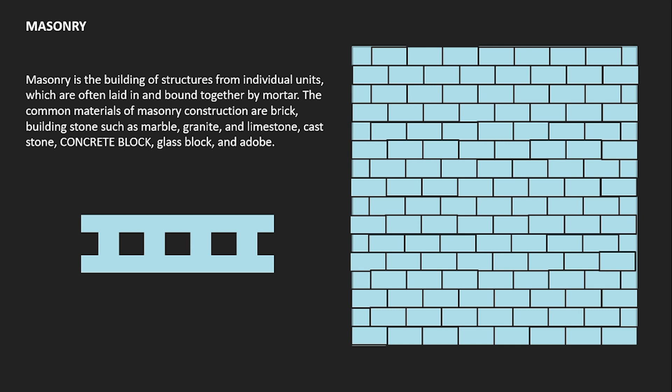Yung mga materials natin na kailangan ma-estimate dito, we have the number of concrete hollow blocks. Number 2, the number of bags of cement na gagamitin natin for mortar. The volume of sand, the gravel. Meron tayong gravel kasi meron tayong tinatawag na wall footing. Yung wall footing, nagkakaroon lang tayo niyan sa ground floor. And number 5, syempre mag-estimate din tayo ng steel reinforcement.

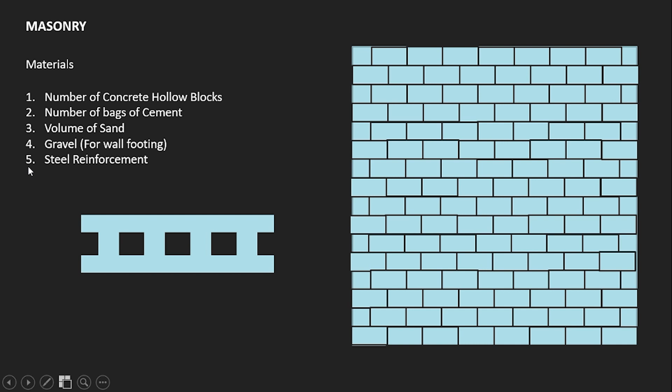Pero guys, for this presentation, magko-focus lang muna ako from 1 to 4. Saka ko na ituturo yung number 5 pag nag-start na tayo sa steel reinforcement. Ngayon, meron tayong iba't ibang components dito sa masonry.

Number 1, ito na nga yung concrete hollow blocks natin. Number 2, this is the mortar for block laying. Number 3, the mortar filler for hollow cell. Number 4, the mortar for plastering. And number 5, for footing.

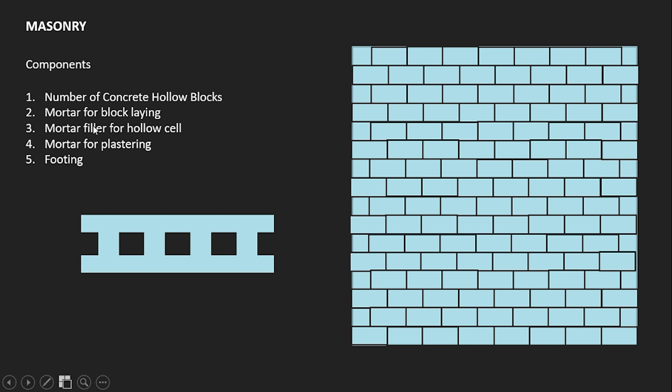Kung mapansin nyo, sa ibang books, walang mortar filler kasi nakasabay na yan sa mortar for block laying. Pero dito, in-indicate ko na hiwalay yan para makita natin yung difference. Tapos yung mortar nga, sabi ko kanina, is combination of two materials lang, which is cement and sand. Tapos syempre, magdadagdag tayo ng water. So yun lang yung mga components dito na kailangan natin ma-estimate of our masonry.

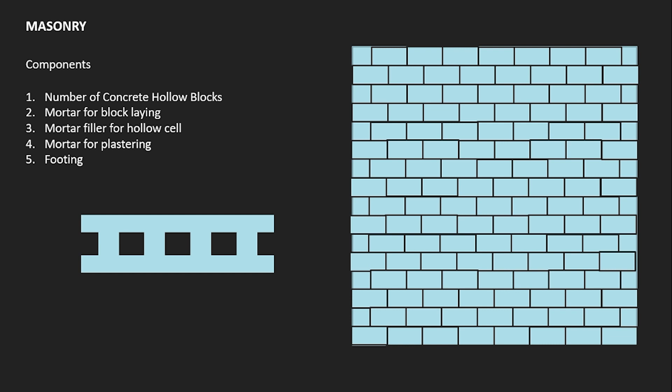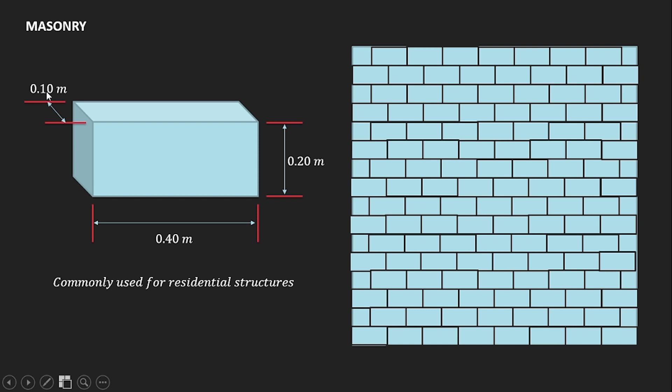Ngayon, yung commonly used for residential structures na CHB natin, ito yung dimension niya na meron siyang height of our hollow block na 0.2 meters or 200 millimeters. And yung length of our hollow block, that is 40 centimeters or 0.4 meters. Yung thickness naman niya for residential buildings, especially pag non-bearing yung wall, yung thickness na gagamitin natin is 0.1 meters or that is also equal to 4 inches.

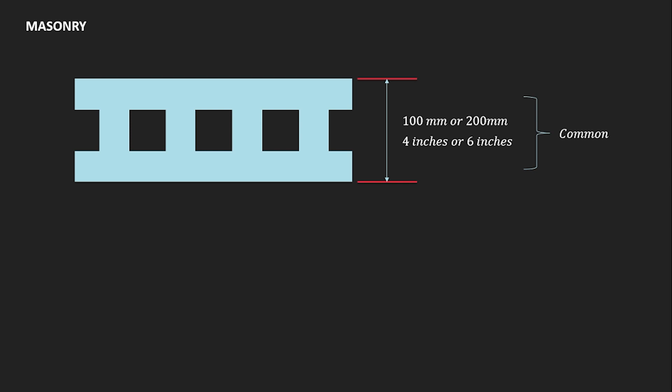So yung hollow block natin or this cross-sectional area, ito yung nakikita natin at the top view ng ating concrete hollow block. Yung thickness niya, nag-range lang siya sa 100 millimeters to 200 millimeters, or for English, that is 4 inches or 6 inches. Ginagamit natin yung 6 inches o 200 millimeters kung gagamitin natin yung wall for bearing. Tinatawag siya na load bearing. Ibig sabihin, yung wall natin pwedeng magdala ng loads. Kaya ginagawa natin sa size ng hollow block, pinapalaki natin or gumagamit tayo ng malalaking sizes. But for residential buildings, yung ginagamit natin is 100 millimeters lang or 4 inches.

Sa hollow block natin, meron tayong mga butas dyan. Yan yung tinatawag na hollow cell. Meron tayong tatlo dito at meron tayong tigkalahati both ends. So baling meron tayong 4 na hollow cells.

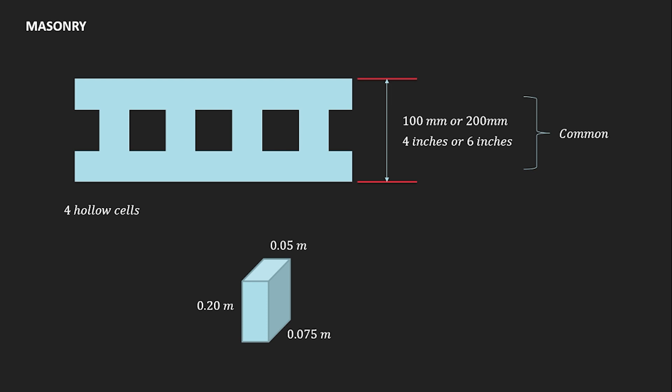Yung dimension of that hollow cell, that is 0.2 meters na height niya kasi galing yan sa size of our CHB which is 0.4 yung length and yung height na 0.2 meters. Tapos yung thickness niya and width of our hollow cell, meron siyang 0.05 meters. And sa baba naman, meron siyang 0.075 meters. So yan yung volume of our hollow cell sa loob.

Kailangan natin ma-compute yung volume niyan kasi para malaman natin kung gaano karami yung i-fill natin sa loob ng hollow cell. Yung volume of one cell, i-compute lang natin yung volume nito. I-multiply lang natin yan, and that is 0.00075 cubic meters. Pwede nyo i-pause yung video and i-check yung pagkaka-calculate ko kung tama na yung 0.2 times 0.05 meters times 0.075 is equal to 0.00075 cubic meters.

Pero guys, since na meron tayong 4 na hollow cells, so mag-multiply tayo ng 4 dito sa value. And that is 0.003 cubic meters per concrete hollow block.

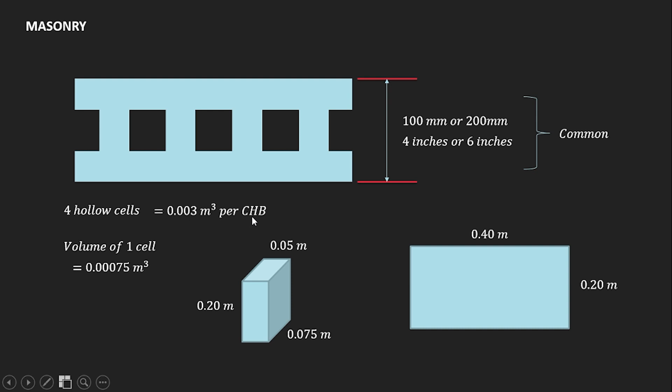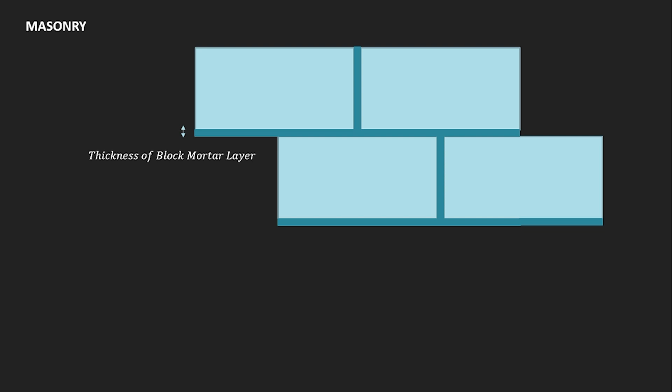So, another component na kailangan natin ma-estimate dito is yung thickness or yung volume of our mortar layer. Usually yung thickness niya for our mortar layer or yung darker na line, pag nagpatong-patong tayo ng hollow blocks, dapat equal to 12.5 millimeters, o pag kinonvert natin sa meters, that is 0.0125 meters. Kailangan lang natin makuha yung volume of our mortar for layering.

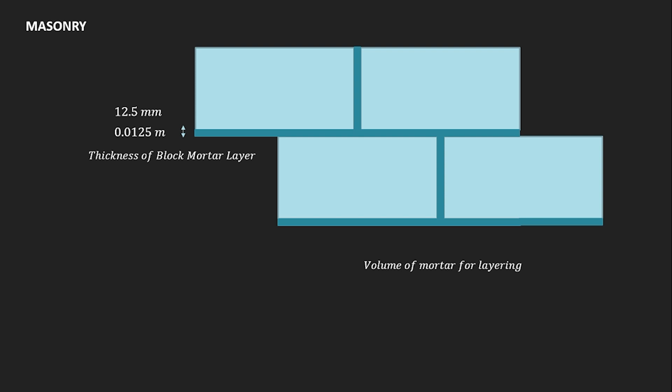Syempre, kailangan natin yung dimension of our 1 CHB o sa isang hollow blocks. Dapat sa ulo natin yung mga dimension niya na meron siyang thickness na 0.1, 0.2 na height, and 0.4 na length. Yung volume niya, that's 0.0125 meters, this is the thickness of our mortar layer, times yung area of our top kasi ilalagay natin yan na layer sa bottom and top of our CHB.

Eh, syempre, yung area niya is 0.1 itong thickness of our CHB times yung length na 0.4 times yung thickness na mortar layer na 0.0125. And that is 0.0005 cubic meters. Pwede natin yan gamitin pag-estimate tayo ng block layer for every CHB.

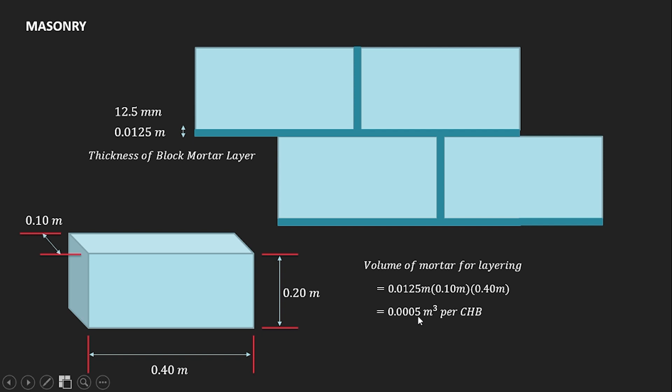Kung nakuha na natin yung number of CHB, tapos kailangan natin ng volume of our block layer, mortar layer. Imumultiply lang natin itong volume na 0.0005 sa number of CHB natin, makukuha na natin agad yung volume of our mortar for layering.

Pero for another solution guys, para makompute natin yung volume of our mortar for layering, ito talaga yung ginagamit ko na solution sa pag-compute ng volume. So this is another solution na pag-compute.

Ang ginagawa ko dito, minumultiply ko guys yung thickness of our layer na 0.0125 meters times yung width of the wall, itong width na yun. If this is the wall, this is the width, and this is the height, times yung 0.1 na thickness of our concrete hollow block, times yung height over 0.2 meters.

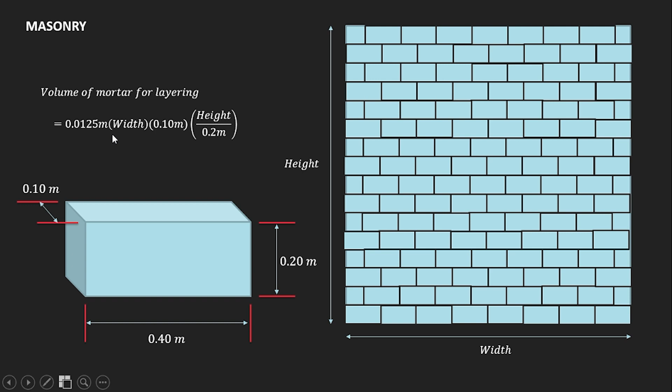Ibig sabihin yan kasi, pag dinivide natin yung height ng wall sa height ng hollow block natin, which is 0.2 meters, makukuha natin kung ilang patong-patong yung concrete hollow blocks natin. Kaya kailangan natin yun na number of layers kasi i-multiply natin kung gaano karami nga yung layering natin. So this is another solution sa pag-compute ng volume of mortar for layering.

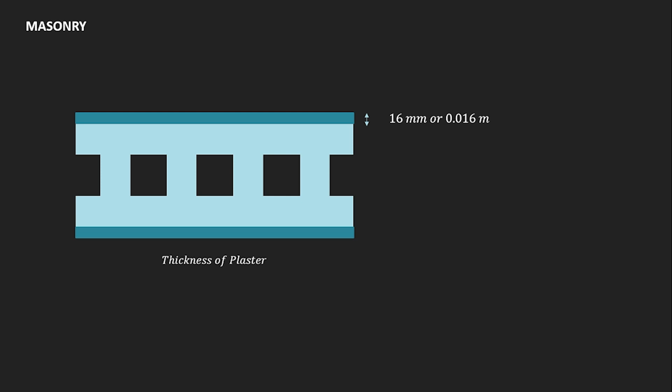Ngayon, pag thickness naman ng plaster, so ito naman ginagamit natin na thickness, that is 16 millimeters or 0.016 meters. Very important guys yan sa masonry natin kung gaano kakapal yung plastering natin kasi pag masyadong makapal yung plaster natin, pwedeng magkaroon tayo ng cracks kasi merong weakness yung concrete natin for tension. So pag masyadong makapal yung plaster niya, hindi niya kaya yung own weight, kaya nagkakaroon tayo ng crackings sa walls natin or plaster.

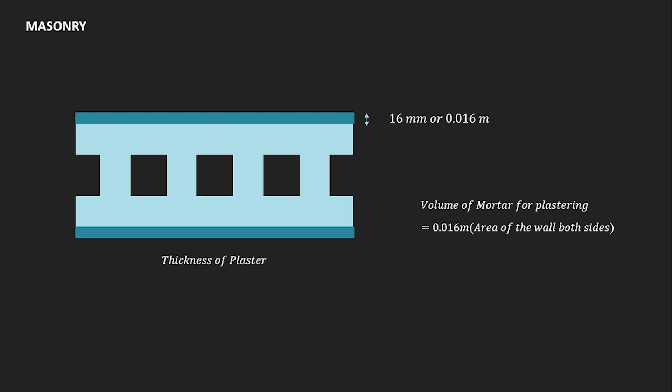Para makompute lang natin yung volume of mortar for plastering, that is simply the thickness of the plaster na 0.016 meters times the area of the wall both sides. Kasi bakit both sides? Kasi kailangan natin mag-plaster both sides kasi para maprotektahan nga natin yung concrete hollow blocks natin. So always times 2 yan na area of our wall.

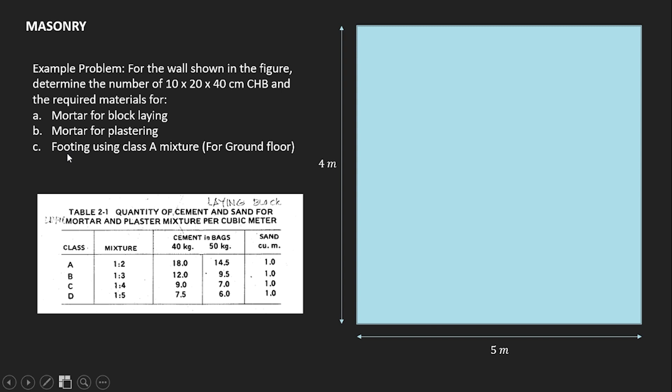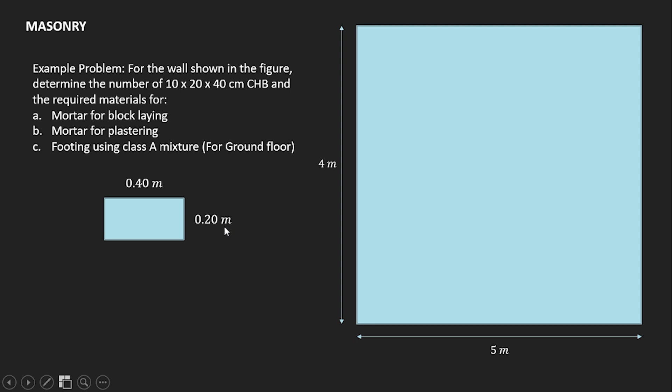Last time, yung tinuro ko, meron tayong gravel. This time, wala tayong gravel. Pero pag compute natin guys sa footing, babalikan pa din natin yung about sa gravel o yung last time na table natin. Yung gagamitin nga natin na area for our CHB, that is 0.4 na length and 0.2 meters na height, so naka-centimeters dito. Pag convert natin yan sa meters, that is 0.4 and 0.2. Yung 10 dito na centimeters, that is the thickness of our CHB.

Para makompute natin yung number of CHB for this wall na 4 by 5 meters, equal lang yan sa area of the wall all over the area of one concrete hollow block. Yung one concrete hollow block natin, yung area niya, that is simply 0.2 times 0.4 meters, and that is equal to 0.08 square meters.

Pero guys, pwedeng palitan natin yan instead na mag-divide tayo ng 0.08 kasi yung 1 over 0.08 that is also equal to 12.5. So, another solution, instead mag-divide tayo ng 0.08, pwede tayo guys mag-multiply sa area of the wall ng 12.5. Ito talaga yung ginagamit ko sa pag-compute ng number of concrete hollow blocks. So, if we have an area of 4 by 5, multiply lang natin yan sa 12.5 and makukuha na natin guys yung number of CHB.

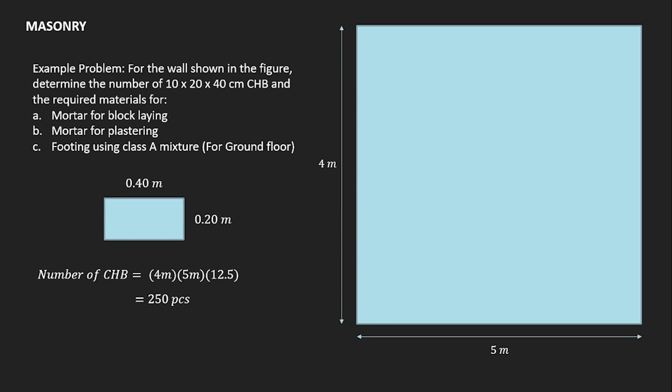And that is 250 pieces of concrete hollow blocks. Pwede nyo guys i-pause yung video and i-check yung pagkakalculate ko kung tama yan. Then after natin makuha yung number of pieces, syempre aalamin natin kung gaano karami yung first layer of our concrete hollow blocks. So for horizontal blocks, i-divide lang natin yung width natin of our wall which is 5 meters sa length of our concrete hollow block which is 0.4 meter. That is 12.5 pieces.

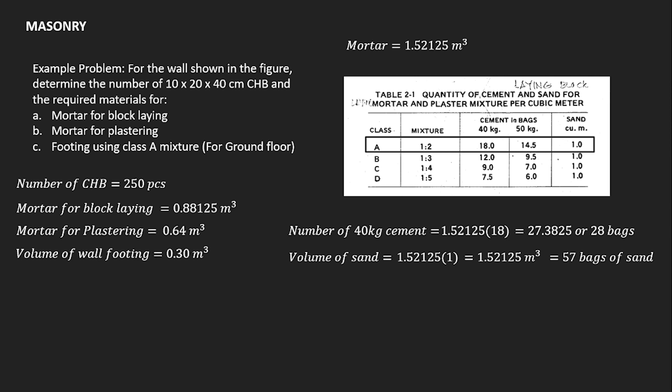Tapos yung volume of sand naman, i-multiply lang natin yung volume of our mortar na cubic meter sa nakalagay dito sa table, that is 1. So that is 1.52125 cubic meters, o pwede natin i-convert yan sa bags of sand, that is 57 bags. Paano ko ulit nakuha yan? I-divide lang natin yung volume sa volume of our 1 sack of sand, that is 0.027. Kung hindi nyo guys nakita yung video ko sa construction estimates for concrete, ilalagay ko yung link sa description below. So 1.52125 cubic meters divide 0.027, that is 57 bags.

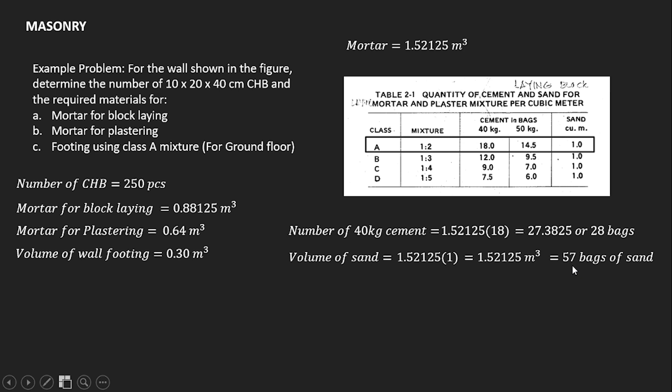Kung mapansin nyo, dapat yung ratio natin for our mixture ay 1:2. Pag nag-multiply tayo ng 2 sa 28, that is 56. So meron siyang sobra lang na 1 sack o 1 bag of sand.

Ngayon, after natin makompute for our mortar, i-compute naman natin yung kailangan natin na materials for our volume of our footing. Yung kailangan natin dyan is cement, sand, and gravel. Kung ganun ang kailangan natin, ibig sabihin yung gagamitin natin na table is from table 1-2 din, o ito yung concrete proportion. Yung class mixture ko ulit na gagamitin dito is Class A, o itong mixture na 1:2:4. Tapos yung multipliers natin is 9, 0.5, and 1.

So for wall footing, kung gagamitin ulit natin is 40 kg per bag. So for number 40 kg cement, i-multiply lang natin yung volume na nakuha natin na 0.30 cubic meters times yung multiplier natin na 9, that is 2.7 o 3 bags.

At for volume of sand naman, i-multiply lang natin ulit yung volume of our footing, 0.3 times 0.5 na multiplier for sand, that is 0.15 cubic meters. Para ma-convert natin sa bags, i-divide ulit natin sa 0.027, and that is 5.55 o let's say 6 bags.

At for gravel naman, yung multiplier natin dito is 1. So 0.3 times 1 is 0.3 cubic meters. I-divide ulit natin sa 0.027 cubic meters, that is 11.11 bags o let's say 12 bags.

Pag tinignan naman natin yung ratio niya o mixture niya, eksakto siya sa 1:2:4. Kasi 3, 6, 12. I-divide lang natin yung 12 sa 3, that is 4. Yung 6 sa 3, that is 2. And 3/3, that is 1. So eksaktong-eksakto siya sa class mixture natin.

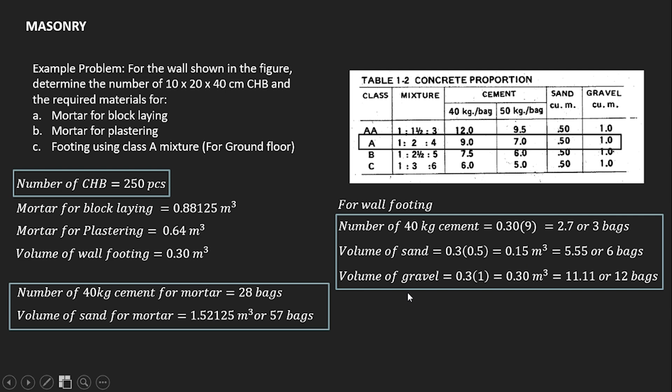Yung for 40 kg cement, for mortar and for footing, pwede natin yan i-add. So 3 plus 28, that is 31 bags overall for cement. At for volume of sand naman, pwede natin i-add yung 57 and yung 6 bags, that is 63 bags overall. O pwede natin i-add lang yung 0.15 sa 1.52125. And for volume of gravel, ito lang yung gamitin natin kasi this is for wall footing lang.

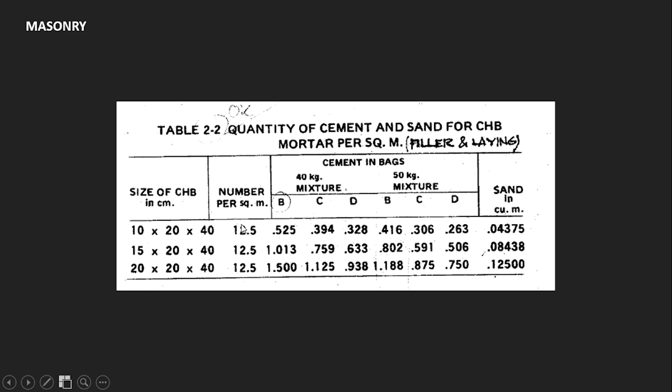Ngayon, as you can see in the figure, meron tayong dito tinatawag na table 2-2. This is the quantity of cement and sand naman for CHB mortar per square meter. Kasi kanina, yung solution natin pag-compute ng cement and sand for our mortar, yung ginagamit natin is volume. Pero kung gusto nyo guys by area, ito yung gagamitin nyo na table. Titingnan nyo lang yung multipliers dito, then same solution pa din.

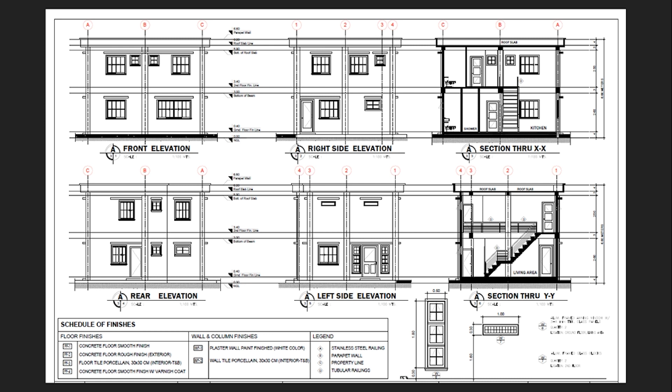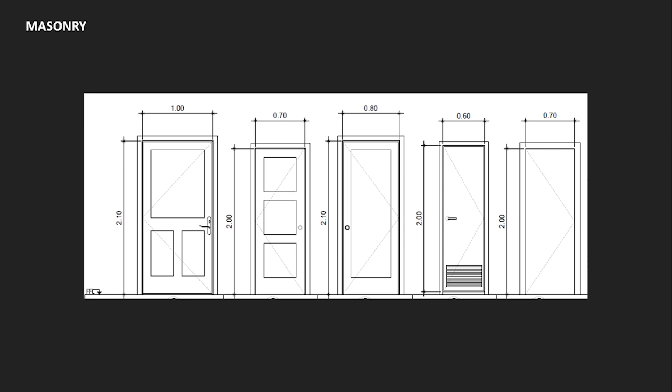So yung openings natin, syempre, yung dimension of our doors, and pwede din sa windows natin, o everything na opening natin sa walls, i-less natin yun sa area. Kasi pag hindi natin yan i-less sa area natin for our wall, syempre, marami din tayong sobrang concrete hollow blocks. So that's it guys, thank you very much for watching.